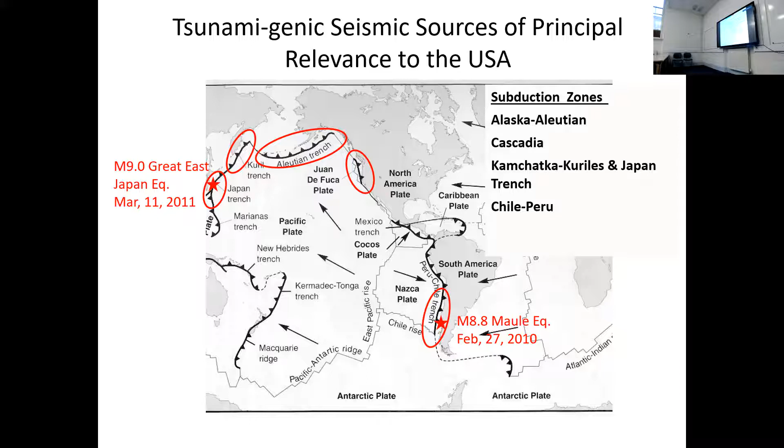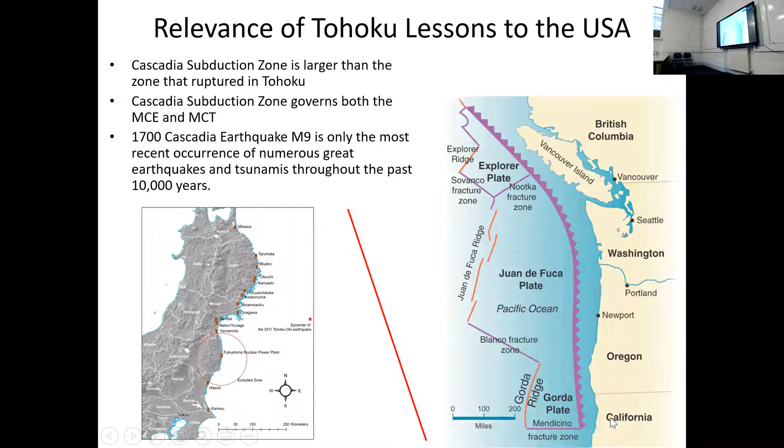So tsunami, obviously you're aware of the earthquake risk around the Pacific Basin, and Hawaii is right here, so a lot of these are aiming at us. We're concerned about what might happen when we see a large earthquake around the perimeter of the Pacific Basin. Japan, of course, had the Tohoku tsunami, or the Great East Japan earthquake, which resulted in major inundation along the northeast coast of Honshu Island. At the same scale, we have a subduction zone right off the coast of Washington, Oregon, Northern California, which threatens similar population along that coastline. So it's of major interest to the US.

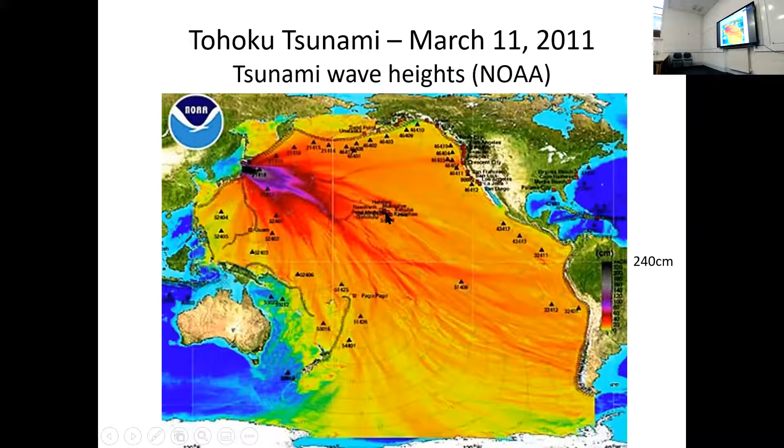This is the ocean wave amplitudes from that Tohoku event, and you see Hawaii here. We had about $40 million worth of damage. Fortunately, no lives lost because we have warning systems. But it was a major event, as you know.

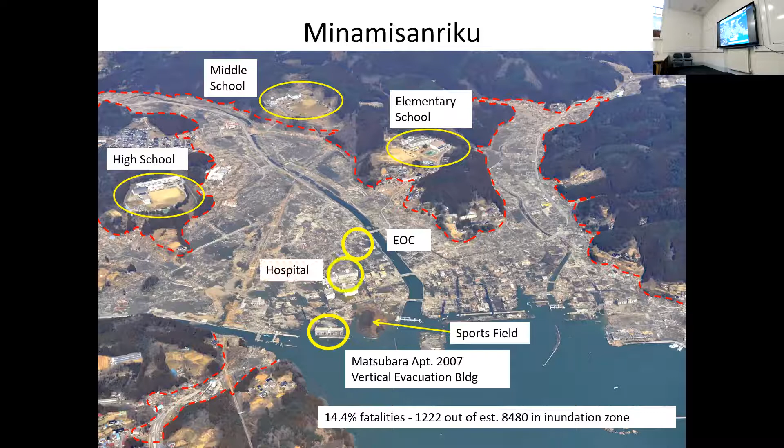But around the turn of the century, they built a sports field right on the coast, and were worried about the number of people who might be there when there's a tsunami. So right next to it, they built a residential 4-story apartment building, city-owned, as a vertical evacuation structure. I'll show you that in a minute. Also in the inundation zone was the Emergency Operations Center and a hospital.

So this is the building right on the coastline, a 4-story residential structure, 99.9% of the time just a regular residential building. But the roof has an elevator and staircase that go right to the roof, which is unusual, and a very substantial barrier around the edge of the roof. You'll notice some debris on the roof because the water went over the top of this building. This was an extreme event for the water to get that high.

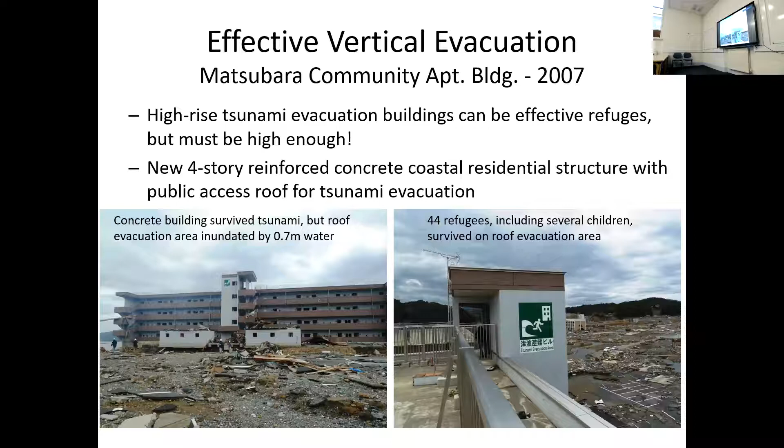But the 44 people on the roof managed to survive. They got wet and it was cold. Remember, this is winter, March 11th. You see some of the videos and there's snowflakes falling. I mean, it was just miserable. And they stayed up there the rest of the night because they didn't want to go down - the waves were still coming in and out. So it's a frightening experience.

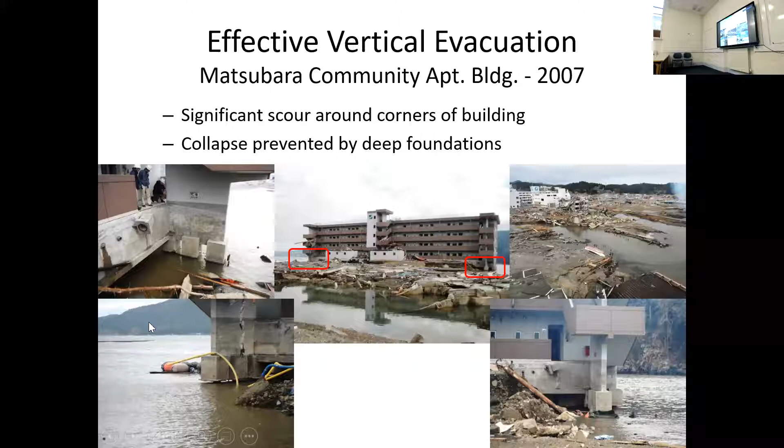The reason the building survived, of course, was because it was built to a tsunami standard in Japan, which is a very conservative standard. You can see the amount of scour - this is where the dirt used to be, and now the scour is below the bottom of these pile caps. You see it here. But fortunately, they used deep foundations, piled foundations, and so the building survived. So we can obviously build for tsunami.

The Emergency Operations Center was also designed for tsunami. It's a moment frame, structural steel moment frame building, and the roof was their evacuation site. The mayor and 29 of their emergency workers responded to this building after the earthquake, and they were reading out warnings over the loudspeaker system for people to evacuate. Only 24 of them made it to the roof in time. The others perished while still calling out the warning.

But unfortunately, the building wasn't tall enough, and so in the end, only 9 people survived. The mayor was one of them, clinging to the handrail on the staircase, which turned out to be stronger than the handrail around the rest of the building, the rest of the roof. So you've lost 21 of your prime emergency responders in one event. It's dreadful. These are mistakes we cannot make again.

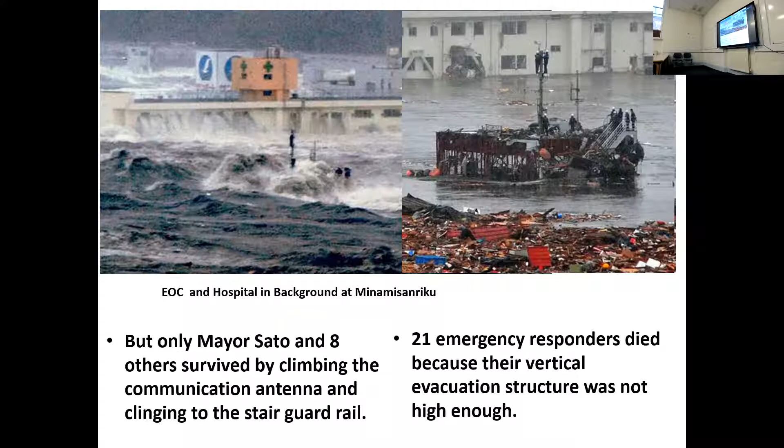You'll see a hospital - this is the hospital in the background, right? Water coming out of the top floor of the hospital. Fortunately, there was a wing next door with an additional floor, and they moved most of the patients over, but there was still a lot of deaths in that hospital. So keeping the hospitals, the emergency facilities out of the evacuation or tsunami zone is important.

So some of the biggest lessons we learned were that historical records are not enough to guide our future. In fact, the one thing we know about history is it actually doesn't repeat. When you're talking about natural hazards - earthquakes, tsunamis, hurricanes - the same event will never occur again. It'll always be different. Unfortunately, the Japanese were using their 1,000+ years of records as an estimate of what was going to happen in the future. We need to do better. We need to use a probabilistic approach and look at the worst possible conditions and decide which of those we want to design for. So that's what we do in this ASCE 7 guidance.

Looking at ASCE 7 itself and the scope of that chapter, ASCE 7 is the Bible for structural engineers in the US. It tells you all of the loads: gravity loads, wind loads, earthquake, rain, snow, everything except tsunami.

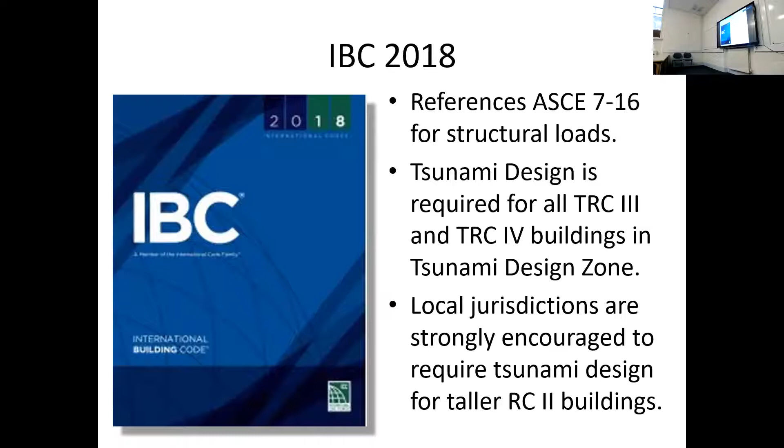The provisions for tsunami design only strictly apply to what are called risk category 3 and 4—large occupancy, critical and essential facilities. But we try to encourage local jurisdictions, cities, counties, states, to adopt tsunami design for taller risk category 2 buildings, which are residential, office buildings, apartments, hotels, because people are going to use them like they did in Japan to evacuate vertically. We should at least be cognizant of the tsunami loads on those buildings and make sure they're going to survive.

We already knew that the USGS had done a lot of work on where these tsunamis come from, on understanding the earthquake sources, so we don't need to reinvent that. There was a lot of open ocean propagation that tsunami modelers were already performing. But the things that were lacking were accurate inundation modeling—the flow velocities as the water comes on land. So this is the area we wanted to look at.

At the other extreme, the consequences and the warning systems were already well understood after the 2004 Indian Ocean tsunami, and we already had warning systems in Hawaii for a long time. But what wasn't defined is how do we want our buildings to behave—what is the risk or the performance of our various risk category buildings?

To make that connection, if I know what the flow on land is going to be—the depth and the velocity—and I know what performance I need from our building, then we need the in-between understanding of fluid structure interaction, scour, structural response, erosion, etc.

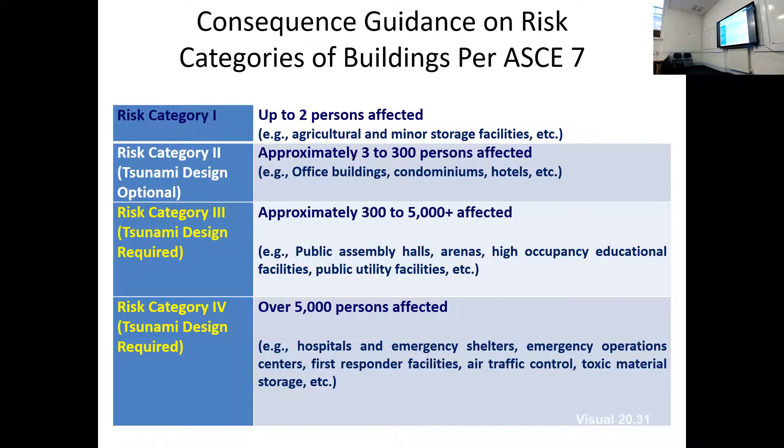So one of the projects I've been working on recently, which has been incorporated into ASCE 7-22, the current version of ASCE 7, is probabilistic mapping of tsunami hazard in Hawaii, which gives us ultimately the flow depth and velocity, and therefore the tools we need to design structures anywhere in the tsunami zone.

This was funded by NOAA, through our coastal zone management program. The folk I worked with - I'm not a modeler, but I know something about tsunamis, so I was able to manage the project. The people doing the modeling are Yong Wei of PMEL and the University of Washington, and Kwok Fai Cheung, who I think is one of the best in the world at tsunami modeling - he's at the University of Hawaii. And we had an independent technical peer reviewer, Patrick Lynett, who's another excellent, one of the world's best tsunami modelers.

So the reason for repeating this mapping: ASCE 7-16 already has tsunami design zones mapped, but they were mapped at 60-meter or 90-meter resolution, meaning the integration points were 60 meters apart. You could miss an entire freeway embankment. You could have a road going through there that blocks the flow, but you'd miss it if you're only monitoring every 60-meter points.

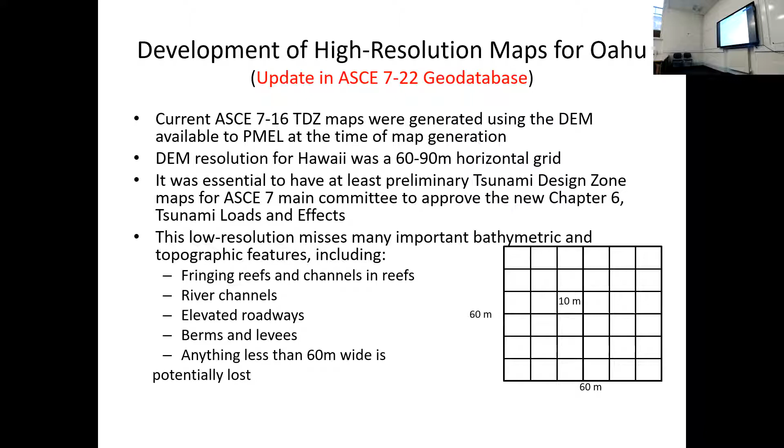So the need obviously is because the original maps were developed with low resolution, we miss some areas that are going to be flooded, and sometimes we think areas are going to be flooded that actually don't get flooded. So you're building for tsunami where you don't need to, and you're missing it in other areas. So it is important to improve the quality of these maps. California has already done it for all of their highly populated areas, and so it was good that we could get the funding to repeat that effort.

All of this information is going to go up onto this hazard tool, the ASCE Tsunami Hazard Tool. That's the current website, and they're adding the 2022 maps now - I don't think they're live yet. This is the older ASCE 7-16 map, but they're very useful maps. They give you the wave height or amplitude around the 100-meter bathymetric line, so where the ocean is exactly 100 meters depth, we give you the wave amplitude for that 2,500-year event.

Because that is the compilation of thousands of tsunamis from around the Pacific Rim, when you're running a site-specific analysis for your particular building, you only have to run one, maybe two scenarios from the Aleutians and Kuril-Kamchatka, for example, but then you have to match them to these offshore wave amplitudes before you allow them to run onshore. That way we can ensure that you're consistent with this 2,500-year event.

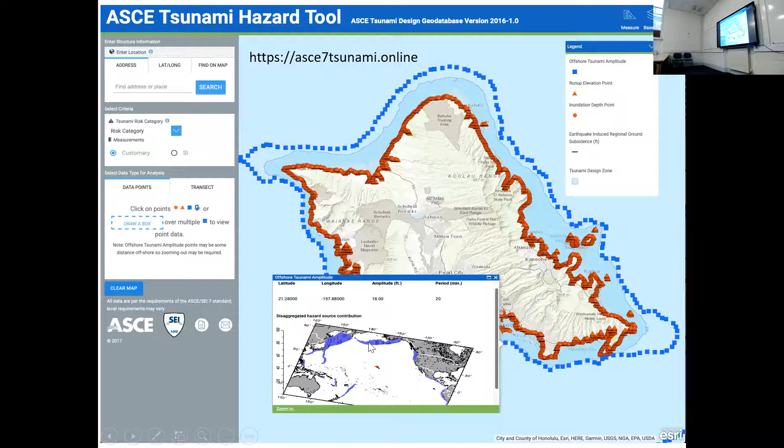Fortunately, these ones are blocked by some mid-ocean features. They're not islands, they're actually slightly below the surface, but that's enough to interrupt and disperse some of the tsunami activity. But the energy coming from the central Aleutians is what threatens us the most.

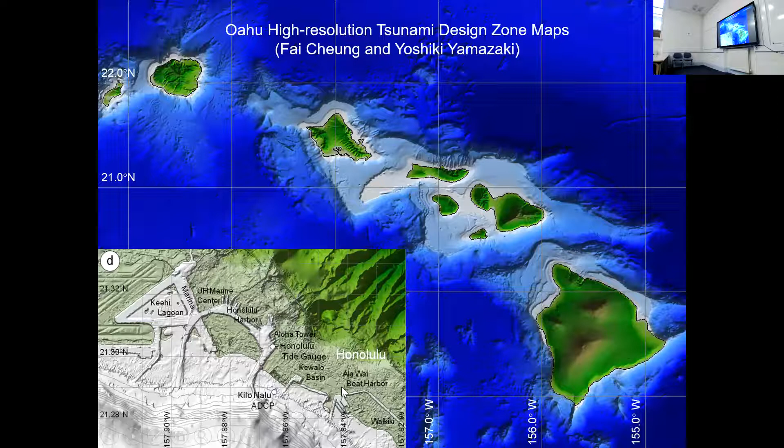So here's the digital elevation model that Fai Cheung has assembled over many years of tsunami modeling. It's based now on LiDAR data, so it's extremely detailed. And the model that he uses is known as NEOWAVE.

The traditional models are hydrostatic. They assume that the water does not move up and down, it only moves horizontally. That takes away a whole degree of freedom for every one of these analysis points. Fai doesn't believe that's the right way to do it, because water does move up, especially when you're hitting an island which has a very steep bathymetry. The water definitely moves up, and he felt it was wrong to ignore that.

So he added that third dimension and calls it non-hydrostatic evolution of ocean waves. That also leads to more realistic dispersion, the wave separates more realistically as it does in reality. He also captures the bore when the wave gets steep enough, it breaks, and he captures that shock energy in his model.

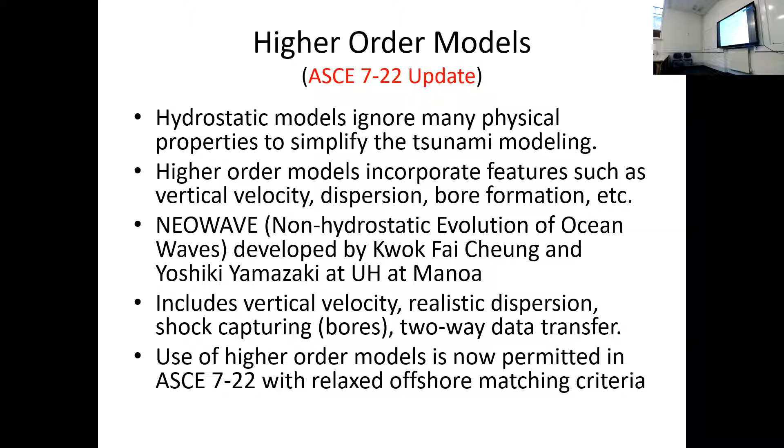And he also models two-way data transfer, not just from the source, from the larger low resolution modeling to higher resolution as you get closer to shore. His model works both ways, so it's considered a higher order tsunami model.

So when you're modeling tsunami coming from the Aleutians all the way to Hawaii, you start with a very coarse grid covering the entire Northern Pacific. That's level 1. Then level 2 grid is more fine, 720 meter integration points, and covers all of the islands, brings the waves to your island, which is then modeled at a closer grid of 90 meters.

And then each of these individual level 4 grids on each of the coastal areas is modeled at 9 meter resolution. So that's how you get the energy from the source all the way to your site, or for us, to the entire coastline of Oahu.

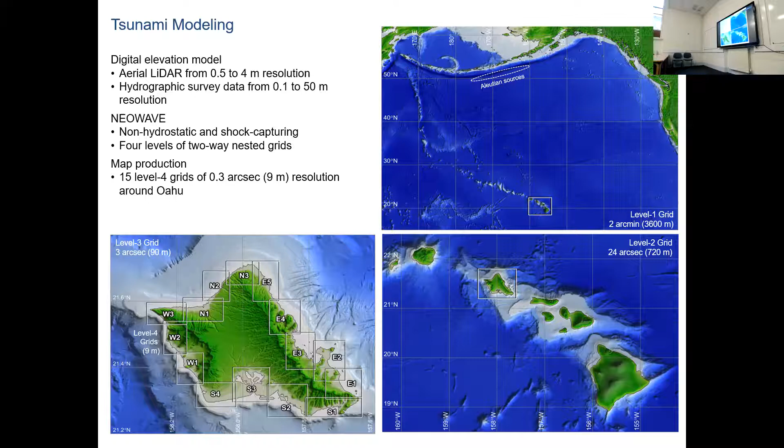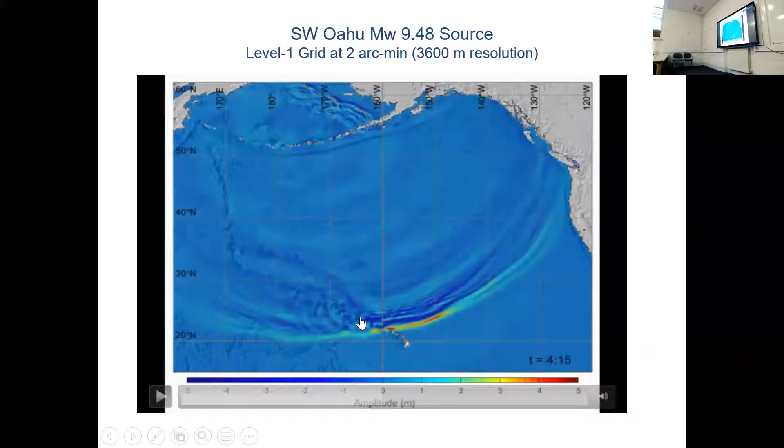We're at 2.5 hours, 3 hours, let me just pause it there. So it's about 4 hours warning that we have after an earthquake happens in the Aleutians before it gets to us. So there is time for evacuation, but not for a place like Waikiki, where there are 200 to 250,000 people in the hotels and the residences. They're never going to get out of Waikiki in time, which is why we tell them to go vertically in those buildings.

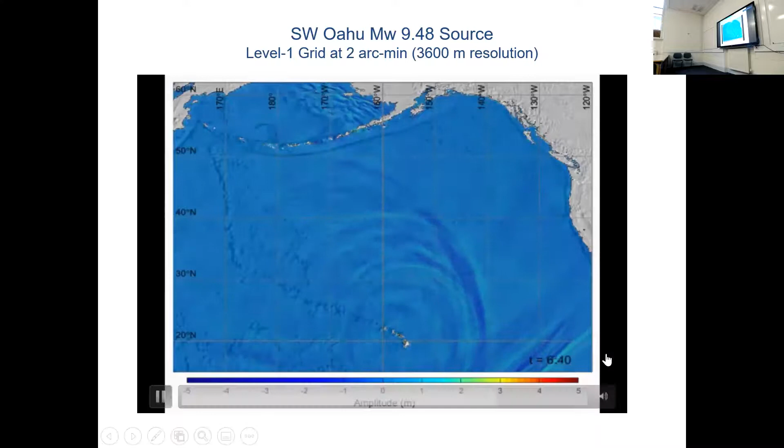So that runs through the islands, you can see all the reflection and dispersion of the waves. This is looking now at the islands, and we're starting at about 3.5 hours as the wave comes down from the north. And we're mapping Oahu.

At the moment, we're working on Maui and Kauai as the final phase of this project, but we've just completed Oahu. And you'll notice, sorry, if you don't keep these live, then they go away. Let me go back.

So you'll notice how the waves wrap around the island, but not only that, they bounce between the islands. Just keep an eye on, let me pause it there, this spot here. There's a lot of very shallow, less than 100 meter bathymetric areas between the islands, and those tend to trap this energy. They start to resonate with the incoming wave.

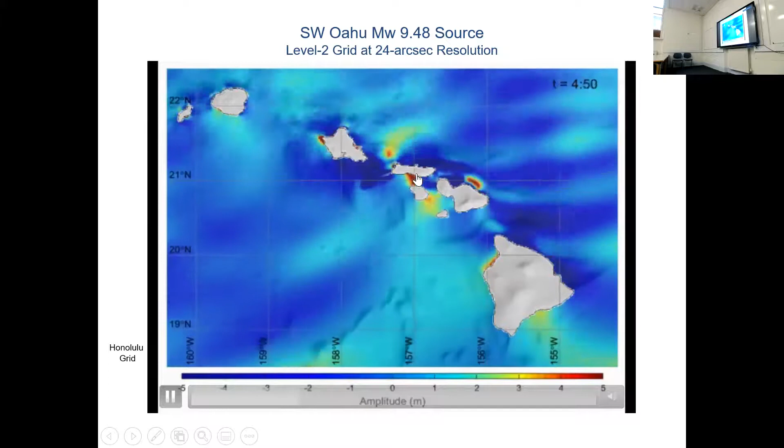And so long after the wave has gone through, they will still be vibrating. You'll see this chunk here and this chunk on what's called the Penguin Bank, and you notice it bouncing back from there to the south coast of Oahu. That is the worst effect. It's not the wraparound, it's actually this reflection and this resonance within the islands.

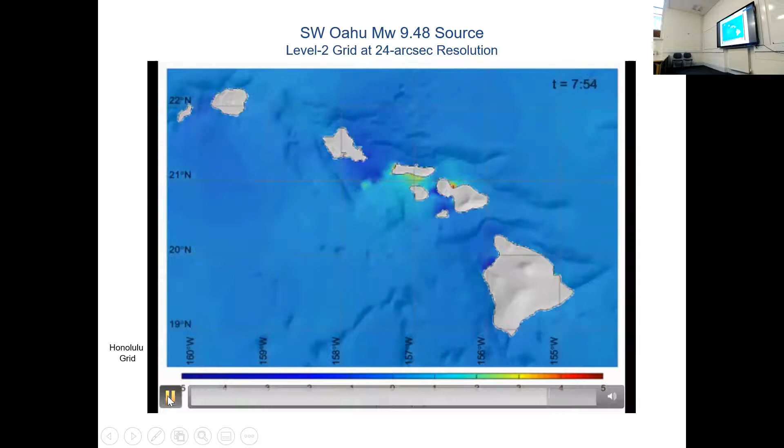And for hours afterwards, we're at 6.5, pushing 8 hours, so the tsunami's been and gone, but there's still enormous waves traveling around. There's big inundation happening in Ma'alaea. So do not think the earthquake's tsunami is over after the first wave, it could go on forever, or at least for another 8 hours. And then looking at the island itself, you'll see this reflection coming to the south shore.

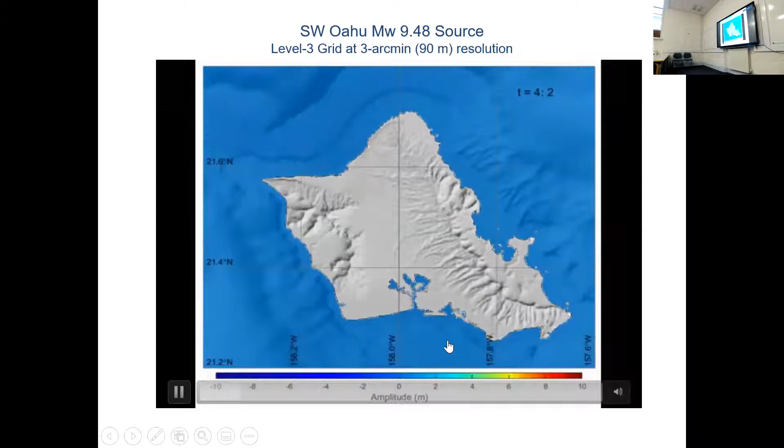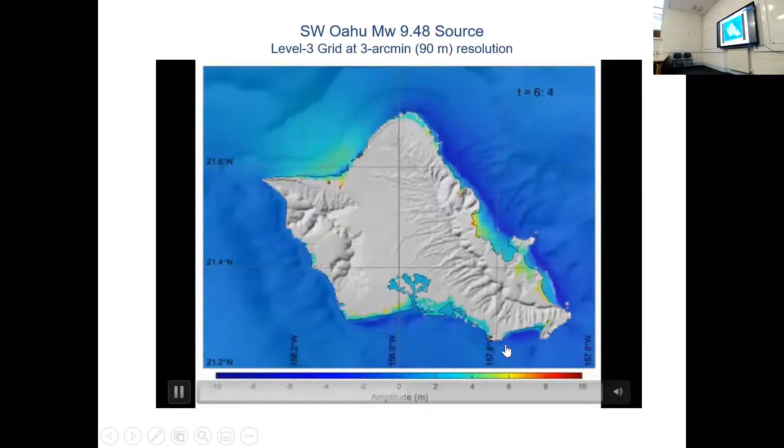Very big inundation on the north shore, obviously, because that's the direct hit. The south looks like it's not going to get anything until we get this bounce back from Molokai coming across the channel. You'll see that right here. That's actually one of the worst reflections coming back.

So it's a tricky thing to understand what's going to happen to your community. This is Waikiki right there, getting completely submerged. The house I used to live in is up on this hill, so it's out of the way, fortunately. But some of these reflections are actually the bigger portion, not the first wave, but the second, third wave. And they're not really waves, they're more the resonance between the islands.

This is our port, so a lot of damage in the port. This is our airport runway. We're not going to be flying in and out for a while afterwards.

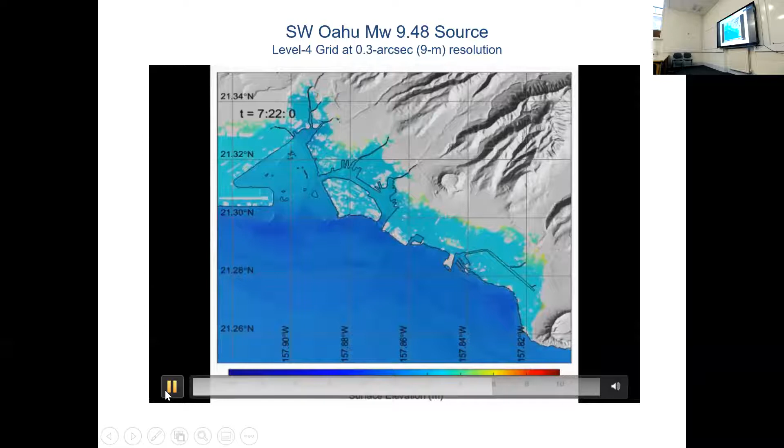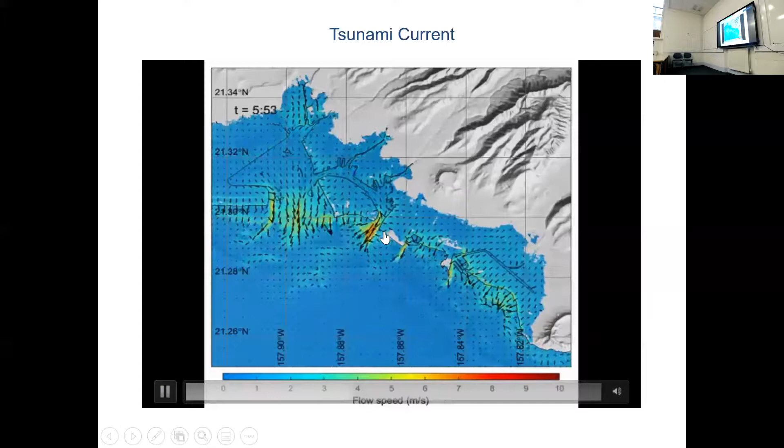The ocean has receded, and now all of that water has to run downhill and get back to the ocean. It's as if you had a flood, and it's a hydrologic study now, studying where the water will go. It's going to go through the channels, the existing channels. So we get enormous scour happening in these existing channels, and it may make some new channels of its own. You'll also notice the turbulence, the eddies that form as the water comes out of these channels. Fai's model is very good at capturing that eddy effect, which we see in past tsunamis.

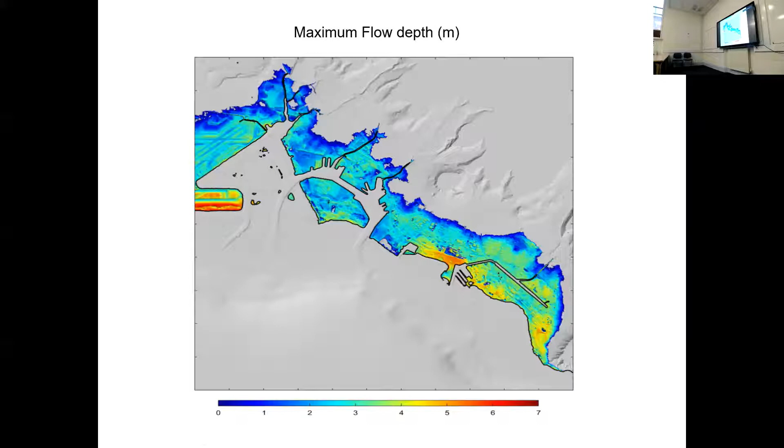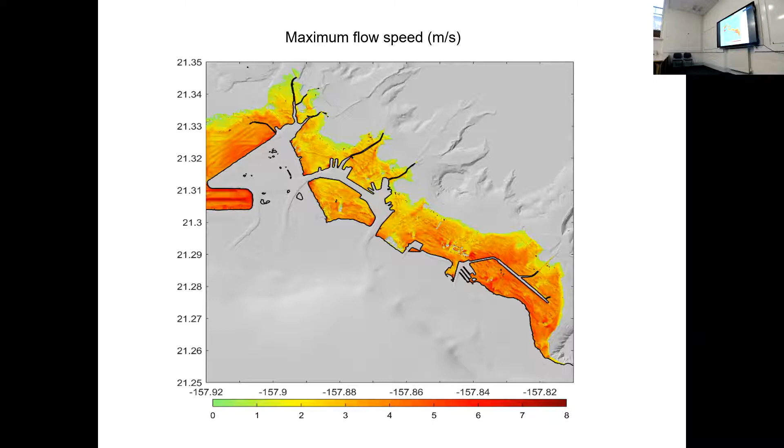So some of the products we provide for the state are the flow depth, how deep the water is going to be, and the flow velocity, speed. I should say speed, it's not velocity. We do give the north, south, east, west velocities, but this is the maximum resultant of those velocities. And then the product HU squared, or the depth times the velocity squared, which is the momentum flux, which is proportional to the loading on structures.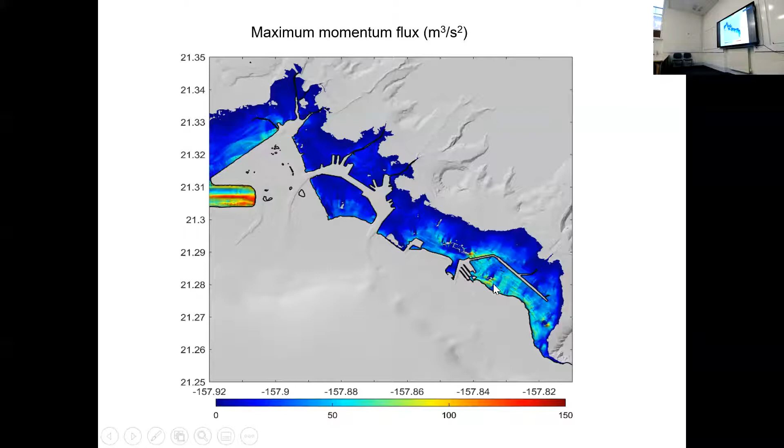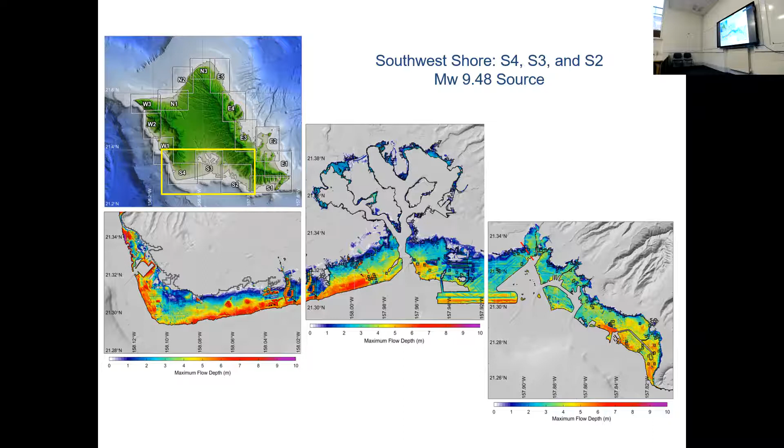You'll notice again, this is Waikiki, this area right here, and they get some of the larger loads. The airport runway, forget about it, there are no buildings there, obviously. But the Waikiki buildings, these need to be designed for tsunami. If we're going to tell people to go up in those buildings, we would best be designing them. So we provide these maps all the way around the island. It's substantial, this is a major event. If we get a Tohoku-sized tsunami in Hawaii, it's going to be a mess.

I show you this one on the Kailua side because I've just moved on Oahu, from Manoa, where the university is, across to the other side of the island, because my son and his wife bought a house right there out of the tsunami zone, thank goodness, and had our grandchild, first grandchild. So we decided we needed to be closer to them. So we bought a house now in Maunawili, and I also made sure we were outside of the tsunami zone.

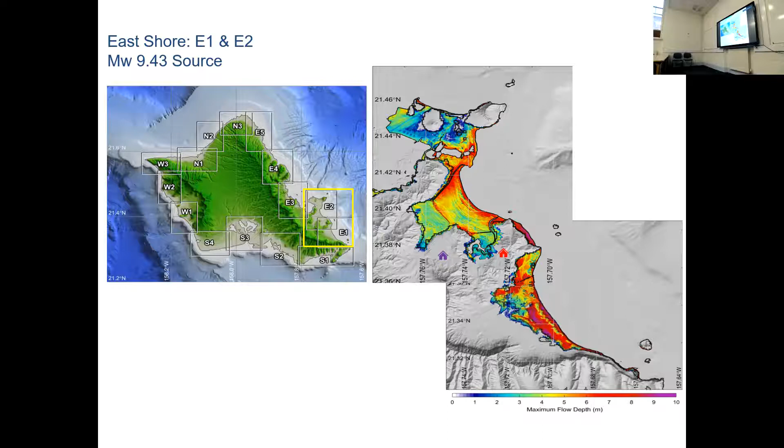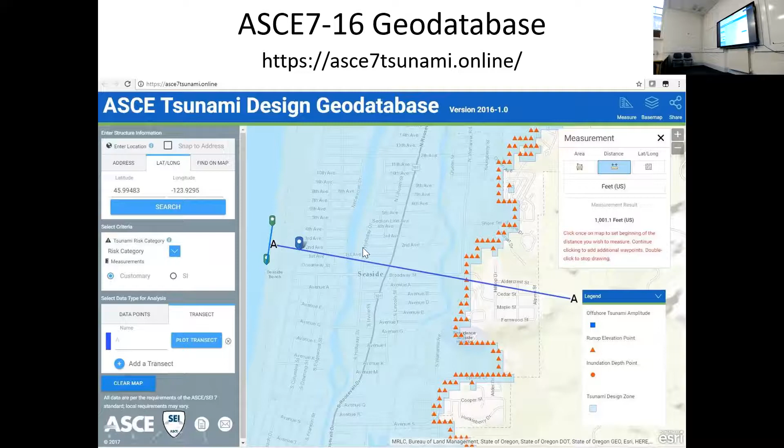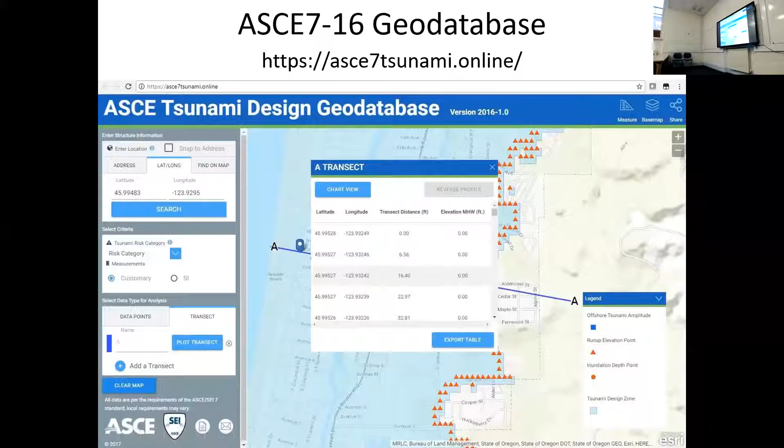I know that much. So the ASCE 7-16 has this geodatabase that I showed you earlier. When you zoom in on it, you can cut transects through the inundation zone. It'll give you the topography based on the digital elevation model, and it'll give you it as a table. You can extract that and then run what we call the energy grade line analysis. This is a relatively crude but simple approach of working back from the run-up to determine approximate flow depth and velocity at your site. We created it because not everybody wants to spend the money to do a site-specific probabilistic analysis.

This would be synonymous with doing a seismic geotech analysis, right? A site-specific geotech study. Whereas this would be just looking at the maps and pulling off the values for ground shaking. This probabilistic approach could also be thought of as a wind tunnel study for wind. You can use the code prescribed wind loads and pressures, or you could do a wind tunnel test and get more accurate values of what you expect.

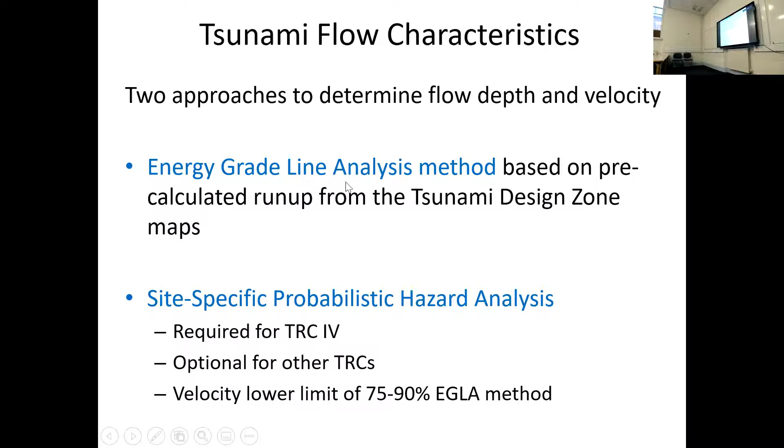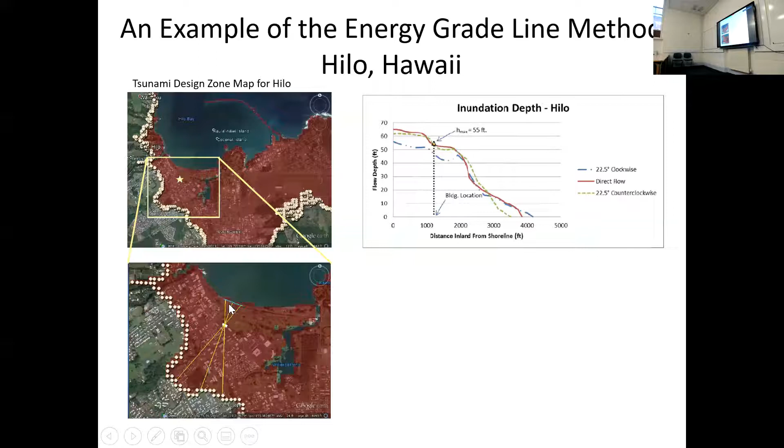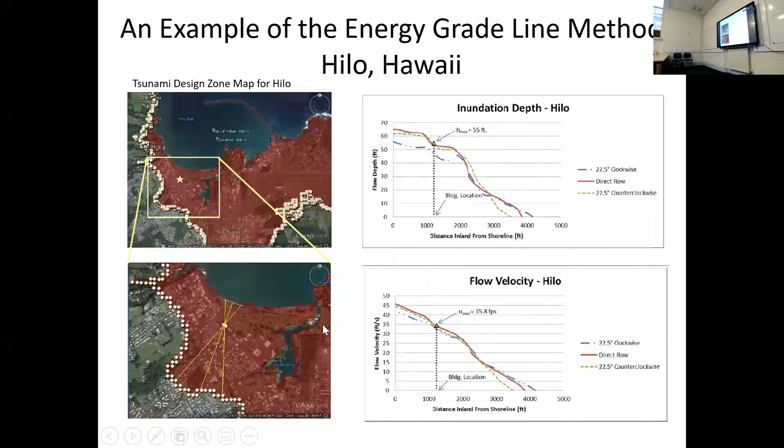Not everybody wants to spend that money, so we developed this energy grade line analysis to solve that problem. When you apply it to a location like this building in Hilo on the Big Island, we require that you run not just the transect perpendicular to the shoreline, but also 22.5 degrees in either direction, because the flow doesn't know that we want it to come in perpendicular. So we need to consider some variability. You get the depth from the run-up point all the way down to the shoreline, so at your building you can find what the flow depth and flow velocity will be. You pick the worst of these three transects and use those values for your building design.

A colleague of mine, Ron Riggs, wrote a software program to do that analysis. I was thinking it could be one of the tools Jonas is putting on the web portal, but Ron sells his program for $99. I told him, you're not going to make any money at that price. He said he doesn't need to make money, but if he charged $500 people would think it's worth having. It really is worth having, because it makes the energy grade line analysis so simple.

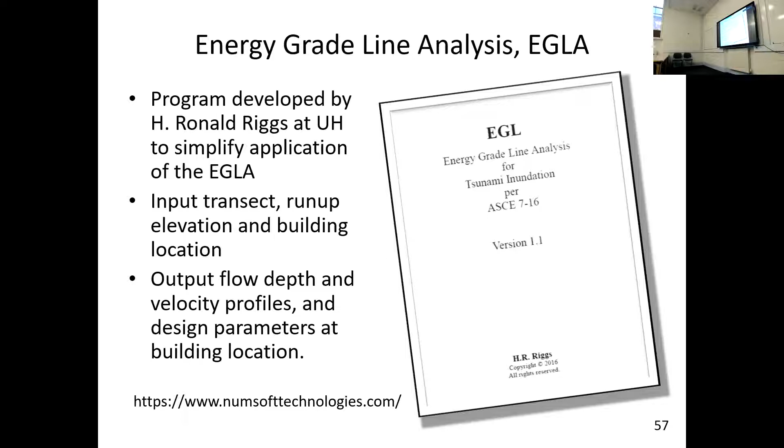All right, so getting into the design itself, we now know what the hazard is. We know the flow depth and velocity, but we only know the maximum flow depth, H max, and the maximum velocity, that's what we get out of the energy grade line analysis.

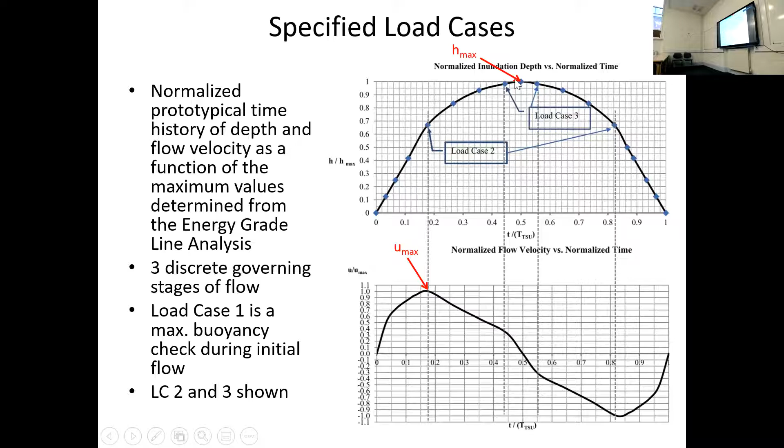So we developed these normalized time histories, based crudely on some video evidence from the Tohoku tsunami. Again, if you do a site-specific analysis, you'll get the exact time history of the tsunami, or at least a better one than this crude value. The velocity increases to a maximum we believe at about two-thirds of the maximum flow depth, but that's not gospel, it's going to vary from location to location. We had to develop something like this so the engineer could use these load cases at the maximum velocity and at the maximum depth to verify that the building is adequate.

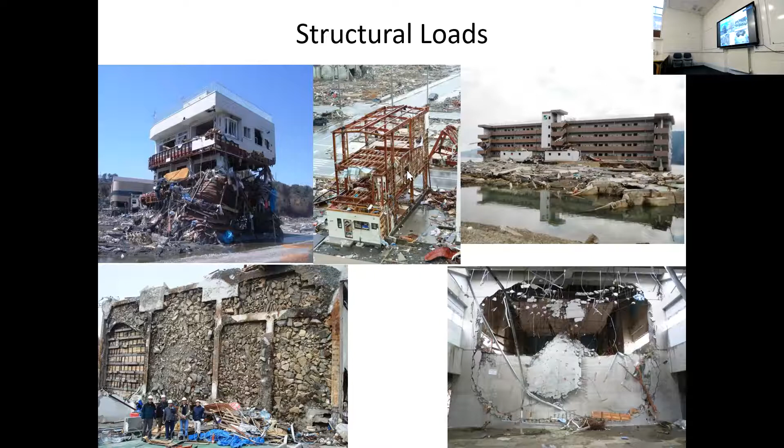We consider all of the loads: buoyancy, buildings floating, hydrostatic and hydrodynamic loads, the effect of debris damming on the face of a building like this one that was damaged because of the amount of debris. We present all of these loads: hydrostatic loads, hydrodynamic loads, drag, tsunami bores on a wall, stagnation pressure, shock pressure in entrapped bores—something going underneath a wharf or harbor pier and hitting the bulkhead at the back, becoming trapped and producing enormous uplift pressures. Then waterborne debris impact from cars, poles, shipping containers, large ships, extreme events, etc. All of these are covered, including scour effects and how you can try to remediate the soils to minimize scour. So all of this is included.

I'm not going to cover many of these, except ones that have benefited from work done here at UCL. On buoyancy uplift, obviously buildings have been seen to float, not just light-framed timber buildings but concrete buildings. During the Tohoku tsunami, they floated all over the place. One way to avoid that floating involves the hydrostatic pressure that develops down the side of a building until the breakaway wall or glazing fails.

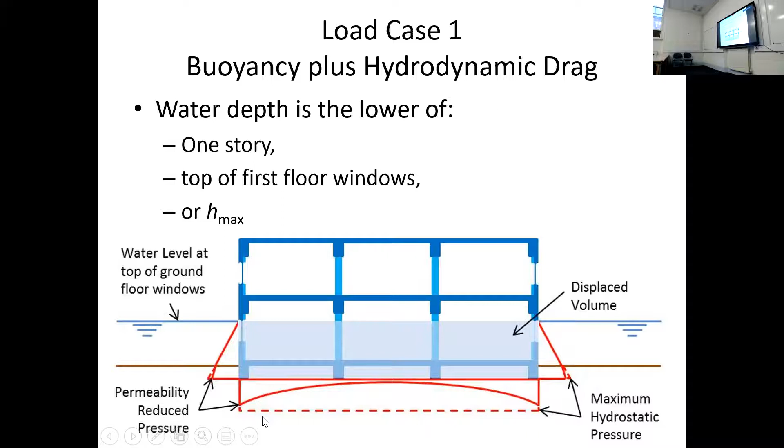We assume that failure doesn't happen until the water gets to the top of the first floor windows, the ground floor windows. At the same time, that pressure develops underneath the building, depending on the type of soil—sandy, gravelly soil will assume the same pressure as the hydrostatic pressure at the side of the building. The way to avoid that is to make your ground floor slab non-structural. If it's not capable of transferring that pressure to the frame, it won't lift the building. Isolating your slab from the frame, the pile caps, grade beams, and columns means that slab will simply fail and you won't float the building.

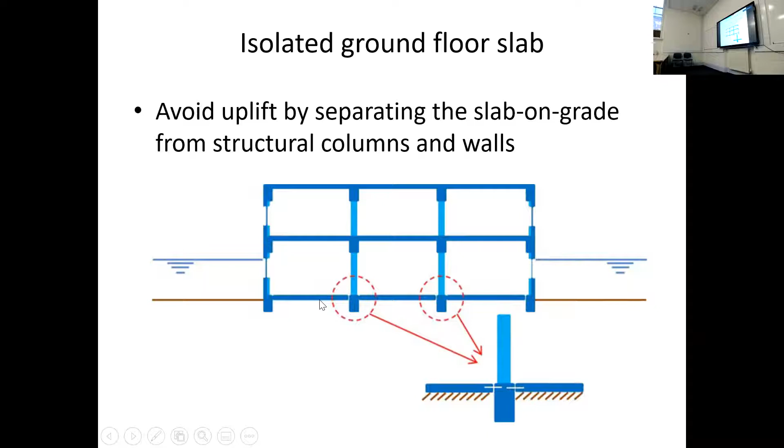Easiest way to solve the problem. Trouble is then you've got this big tumbling mass of slab on grade roaming through your building, impacting the columns. We hadn't thought of this in the ASCE 7-16 version.

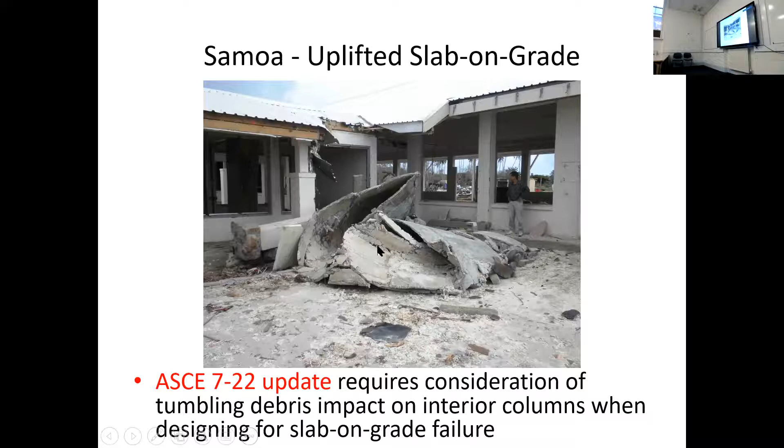So we've now added a requirement. If you use breakaway slab on grade, then you have to design the interior columns for this tumbling debris. So that's something we've added now.

This is because of the work that Marta, one of your colleagues working with Tiziana, Marta Del Zoppo, has done on the effect of buoyancy due to air trapped below the floor and above the floor, until the framing on the second floor and the exterior wall fails, there's no water on that floor. There's actually an enormous amount of buoyancy that can develop, and that lifts the building, which reduces the axial force in these columns. If they're concrete columns, that generally reduces their moment capacity. So we added a section in the commentary to warn the engineer that they need to consider this effect.

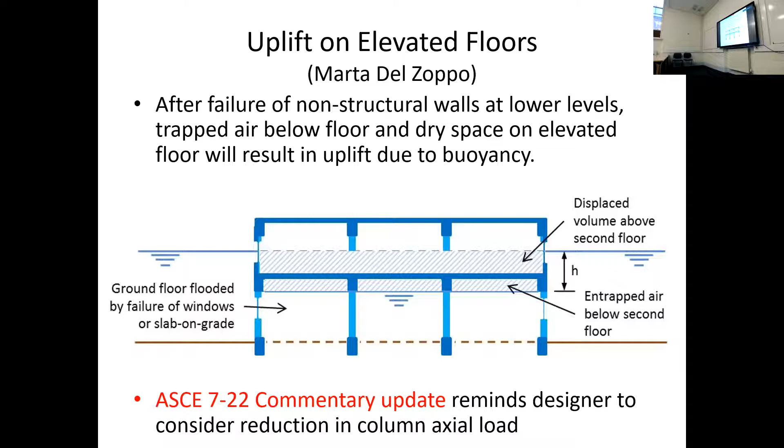They can't assume full gravity load during the tsunami - not just submergence of structural elements, but these buoyancy effects because of trapped air or open spaces on upper floors. We saw that during Hurricane Katrina, back in 2005, where buildings with double-T precast, pre-stressed planks spanning 60 to 70 feet in some cases, but with bulkheads at the end that trap the air - as the water comes up, there's nowhere for that air to go. So these basically float and break backwards. Pre-stressed sections are already stressed to counteract the dead load. Now you're putting buoyancy underneath them, and the first elevated floor - we found 10 of these parking garages that had completely failed. The second floor used to be up there, now it's down on the ground. So buoyancy is real - ask Archimedes.

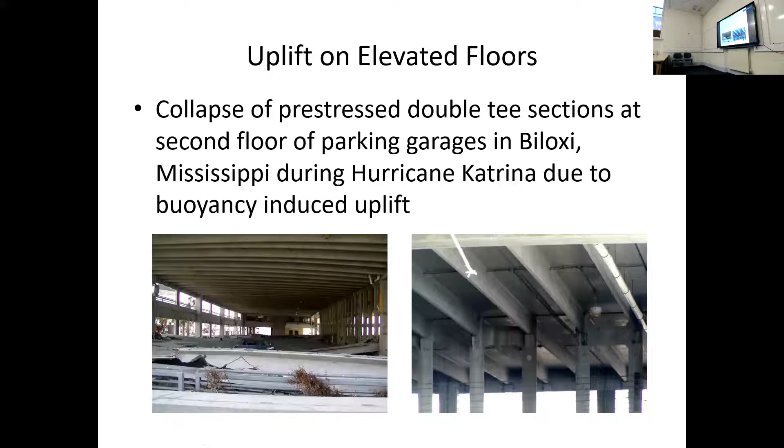He knew about that. Another area that we benefited a lot from work here at UCL - and I know many of you will have seen these slides from Marco himself in presentations he's made, so I'm not going to show them all - is one of the options we give the structural engineer: as you're designing your lateral frame system and structural components, columns, beams, walls for tsunami load, you can use our prescriptive approach, strength design, prescriptive loading, etc. Or you can use a performance-based approach.

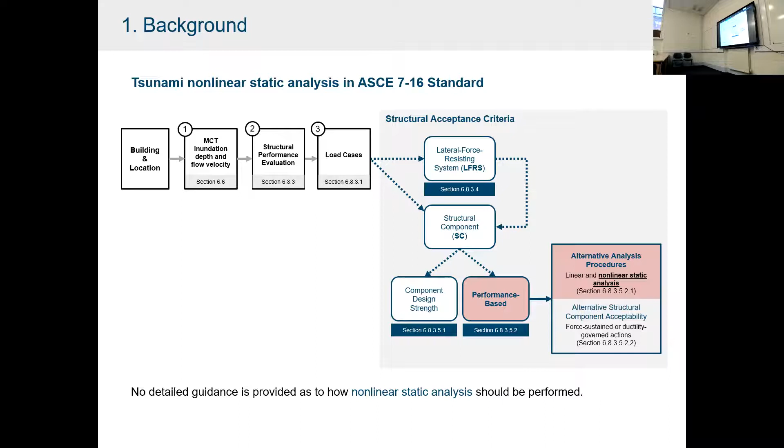We allow you to use linear and nonlinear static analysis, meaning pushover type analysis, but we don't tell you how. The only pushover analysis people are familiar with is seismic, which is actually not a good application of pushover, because seismic is highly dynamic, and a pushover is a monotonic loading on the building, slowly increasing the load, pushing it over. That's not appropriate for an earthquake at all. But it is appropriate for a tsunami, because that's exactly what the tsunami does - it slowly increases the load on the side of the building and tries to push it over. So I actually prefer pushover analysis for tsunamis than for seismic.

You might already have heard of constant depth pushover and variable depth pushover, both developed here at UCL - you can see some of the researchers down below. The disadvantage with these is that the flow is not constant depth. A tsunami doesn't start at 3 meters deep and simply accelerate - it starts at 0 and grows while it accelerates. So that's why variable depth pushover was introduced.

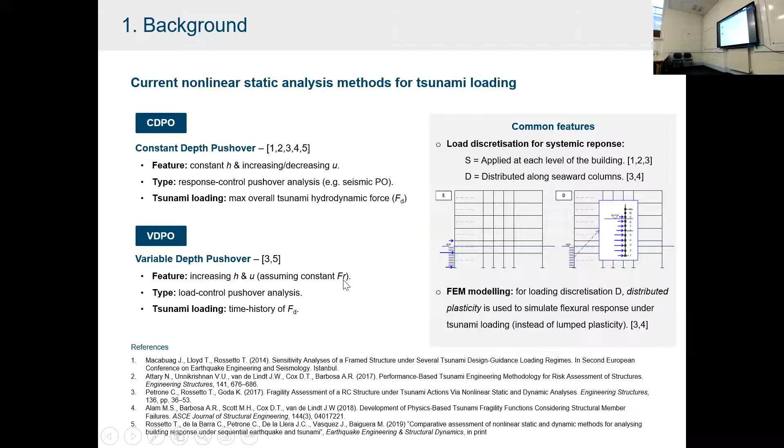However, the problem with this one is it assumes a constant Froude number, which also isn't strictly true. So what Marco did was incorporate a two-phase variable depth pushover, geared specifically to following those time histories I showed you earlier for flow depth and velocity that we think better represent the change in depth and velocity based on the Tohoku tsunami. The two-phase approach is that he starts out under load control, and as soon as he reaches instability in the model - meaning the structure is starting to fail or some components are failing - he switches to a response-controlled, or displacement control, analysis. He did a very good job developing that.

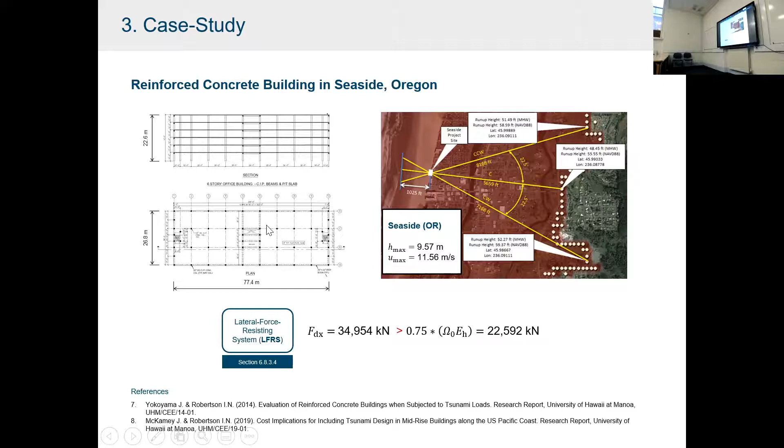Then he applied it to a building we had already designed prescriptively. I had the students below designing this following ASCE 7-16 prescriptive design. Marco took that building in Seaside, Oregon, and applied the pushover analysis. He did that using OpenSees, an extremely powerful nonlinear analysis program that uses a fiber model - a highly detailed representation of the material in the column, for example - but as a two-dimensional model.

So he had to take this three-dimensional building and break it up into a series of frames to mimic all of the response of all of the components. Quite a tedious task. Not something that the design engineers will do, certainly in the US. They don't have the time for that.

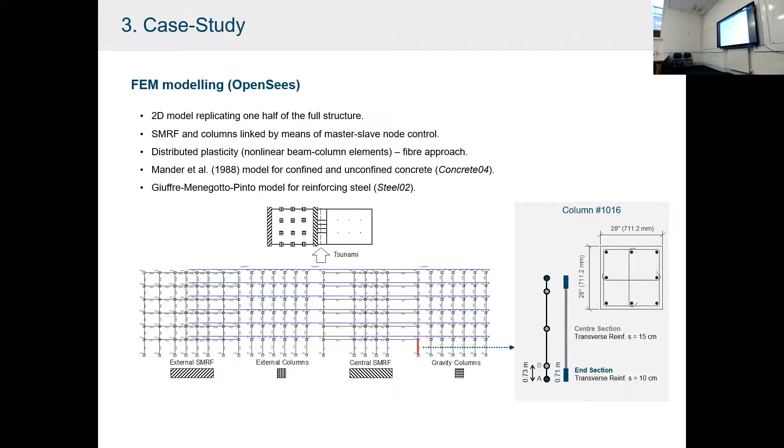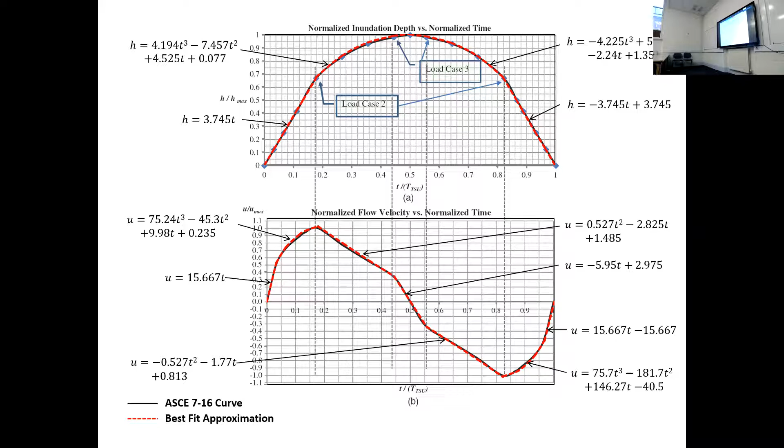But one other thing Marco did in the process was digitize what we had drawn, as a replica of video evidence from the Tohoku tsunami. So he developed best-fit equations for these depth and velocity time histories, because he needed to follow those as the flow depth and velocity increases through the tsunami.

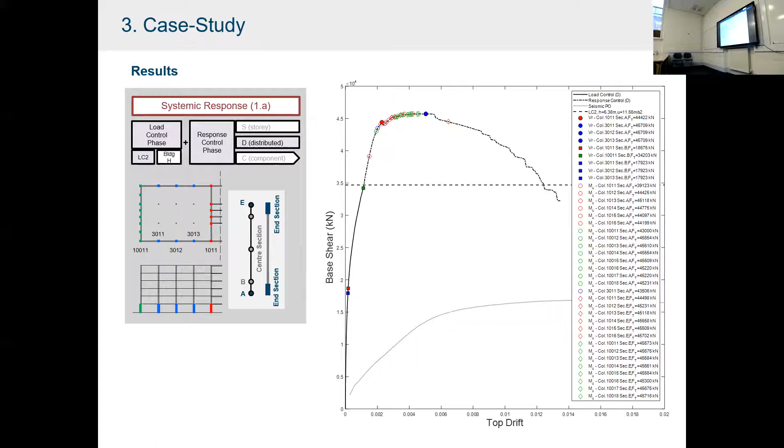So doing the nonlinear pushover analysis can save you significant money in the design or retrofit of a building. So this has just been published. I think it was finally published last month, maybe November, after a lot of effort. But yeah, very good publication.

So that has gone into ASCE 7-22. We now use Marco's paper and his guidance to guide the engineer on how to do this pushover analysis following ASCE 7 tsunami flow parameters. So that's a very good improvement to what the engineers have.

And we included figures based on what Marco put into that paper, showing you how you apply the loads either at the floor levels or distributed up the column. He showed that the difference is minimal, so you can do either of those two.

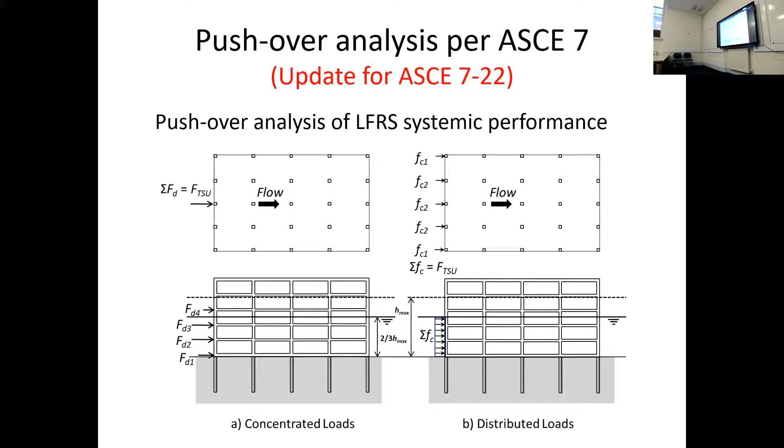For the overall structural system for the building, and for individual components, each individual column has to be analyzed for increased loads on that column. Think of wind loading. When you're designing a single window, you use a higher pressure than for the entire building, because for the whole building you're averaging the pressure. It's the same with tsunami.

The force on the entire building doesn't mimic the possible force on each individual element. So to protect these individual elements and design them appropriately, you have to put the increased load on that element, then reduce the rest of the system load on the other elements and analyze the full building again, doing that for each of the individual components that could be critical to performance. So this is now explained in the ASCE 7-22 appendix.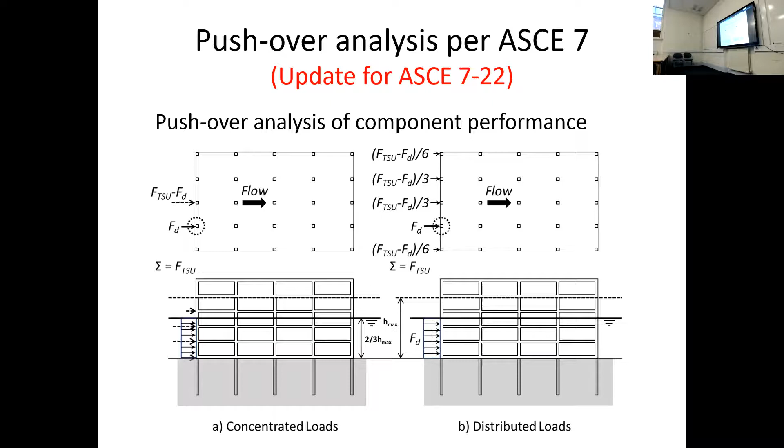I now have a student, Derek Aegerter, who is working on a simpler model. OpenSees, as I mentioned, is a very complex model. It's not used by design professionals much at all, more by researchers. ETABS is used by almost all of the structural engineers in the US, or something similar. STRUDL, STAAD, RISA, all very similar programs.

If they have a nonlinear component, then it is a lumped plasticity - it'll be at the end of the column or beam where we assume the yielding is going to happen. It's not a distributed fiber model. So that's a disadvantage, but it's so much simpler, and engineers are familiar with it. It's easier to put together a 3D model, saving the trouble of splitting it into 2D.

You have to predefine the yielding behavior of those lumped plasticity points, whereas in the OpenSees model you define the material constitutive relationships - how the concrete will behave in compression and tension, how the steel will behave, because each of your fibers consists of one of these materials. One advantage with ETABS is that it does both a flexural bending check on your members as well as a shear check, whereas Marco had to do the shear check as a post-processing step to check if there was a shear failure.

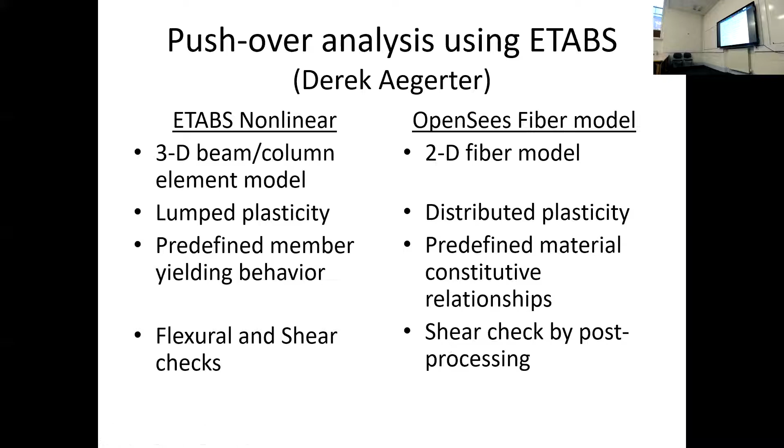Another advantage of ETABS, of course, it's a commercial program, so they create nice graphics that let you see how the building's behaving. You can see which joints fail first, what the building looks like. You can see that this is a tsunami analysis because only the bottom of the building is moving. The top is just moving laterally, but it's not deforming. So you get a better user interface with a program like ETABS.

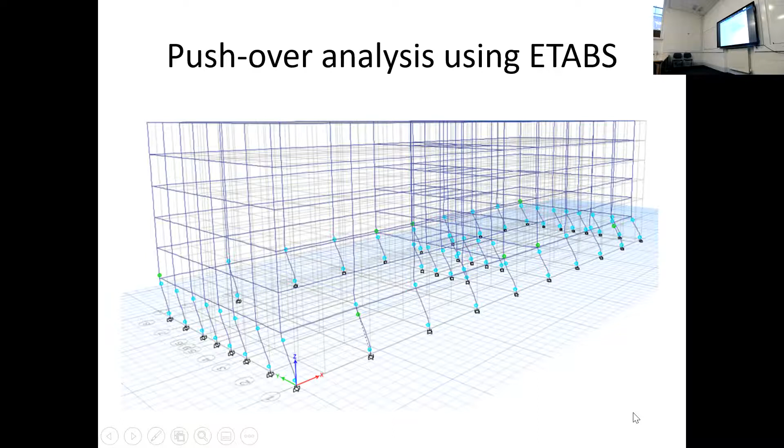I'm hoping to work with Marco to publish this work, and Derek too, because I think this will be very encouraging for engineers who want to use nonlinear analysis for tsunami design.

Finally, one other update on the ASCE 7-22. Let me check my timing... ooh, I'm going way long.

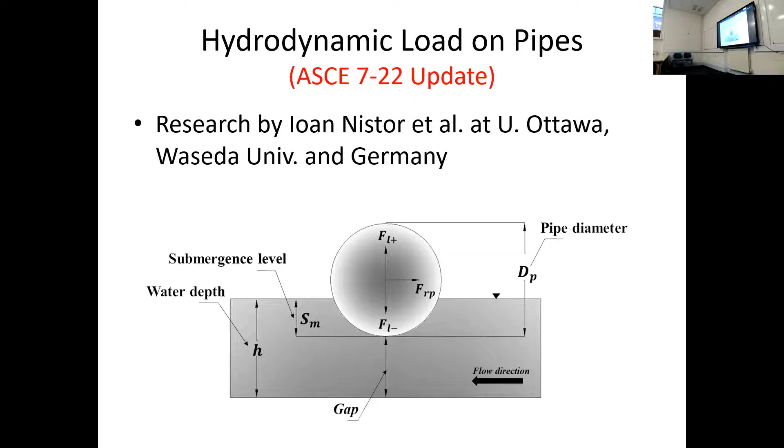The reason I tell you this is if you're doing research on loading of components—this was pipes. We don't cover pipes at all at the moment, but Ioan Nistor at University of Ottawa did a whole lot of research, thousands of tests on various sizes, shapes, and elevations of pipes, and developed expressions for the resistance factor and the uplift factors. If you're doing research on tsunami loading, we'd love to hear the results, because these have now been included into ASCE 7-22.

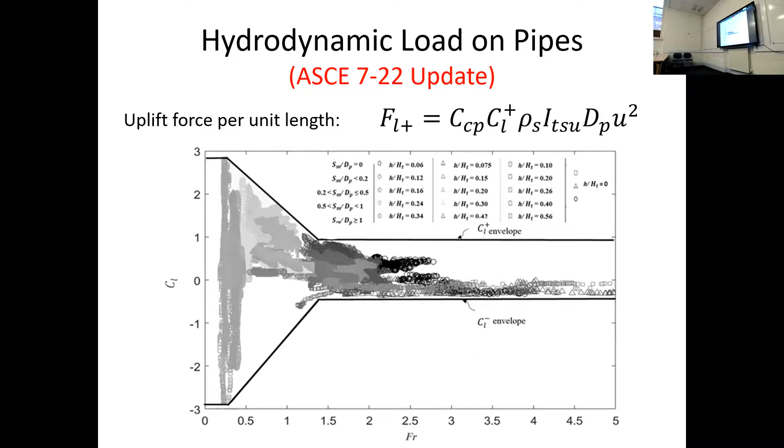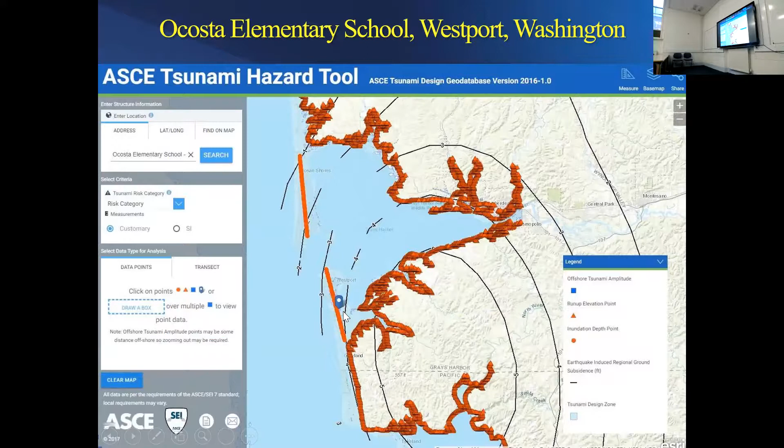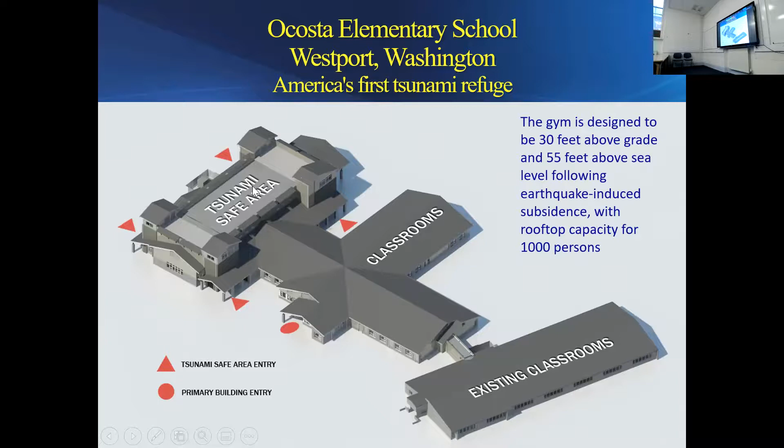I want to show you two buildings that have used this chapter to design for tsunami evacuation. One is a school building, the other a university campus, both on the coast. The school building is on a peninsula that's going to be totally overwashed, so the water is going to go right over the top. The school is right there. This is the existing school, and they were going to be expanding, adding classrooms and an auditorium, a gymnasium for basketball, etc.

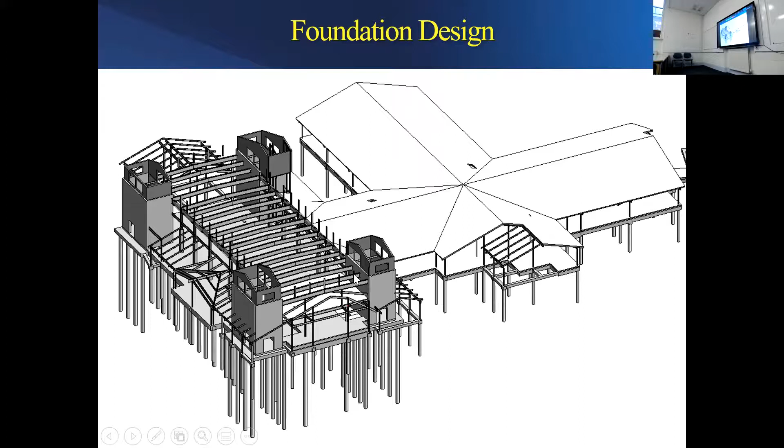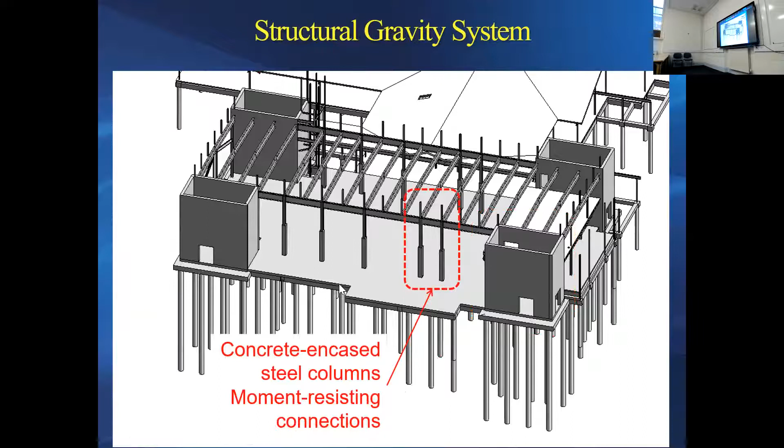So they decided they would improve the strength of the roof, add four staircases to get people to the top of the roof, and use those as the shear walls to brace the overall building. They would protect the steel columns by encasing them in concrete for debris impact, and then the roof becomes the evacuation zone. It cost another $2 million to upgrade the building to that status.

But if you work it out, it's only pennies per day for each child in the school, and that buys peace of mind. The parents don't have to think about what's going to happen when there's an earthquake—they know their children will be safe. So these are a great addition to that community.

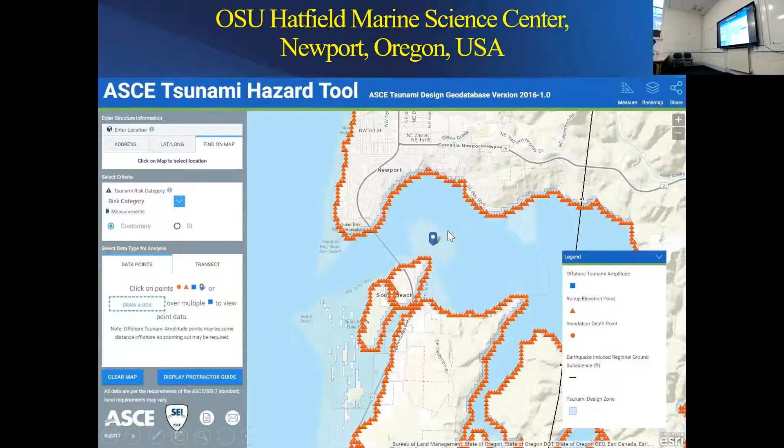Oregon State University has a marine science center on this peninsula in Newport, and they were building a new building. They decided to make it a vertical evacuation structure so that everybody on the campus can go there if they need to. There's a ramp that goes up to the roof. It's open 24 hours a day—no gates, no locks, nothing to keep people out. It's now complete; they started occupying it last fall, and it now gives peace of mind to everybody working in that community.